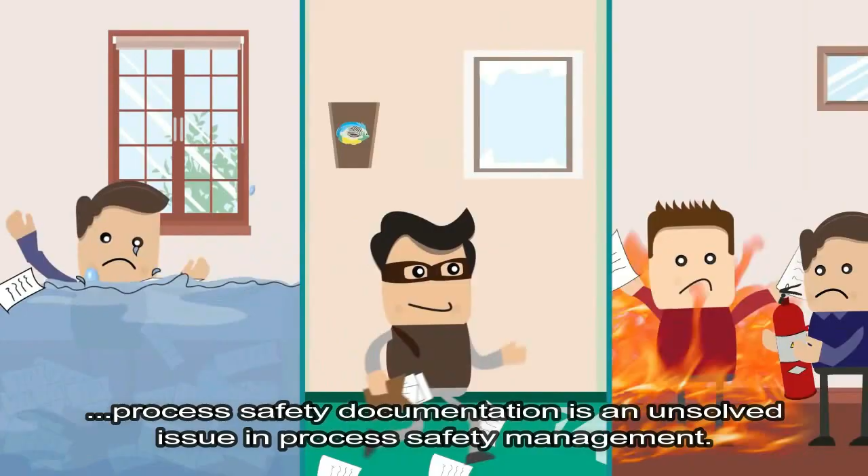Unavailability of an intelligence system to monitor plant performance, from informative process safety documentation, is an unsolved issue in process safety management. Unavailability of an intelligence system to transfer tacit knowledge to the next generation is also an unsolved issue in every plant.

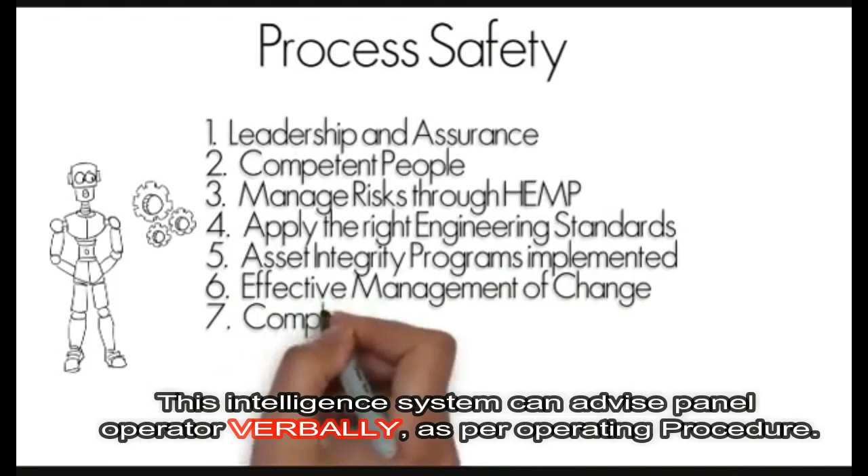Predictive intelligence system is the only solution to handle this unsolved issue in process safety management. This intelligence system is able to implement process lessons learned from previous incident investigations. It can advise the panel operator verbally, as per operating procedure, and it also contributes to layer of protection analysis to reduce alarm rate.

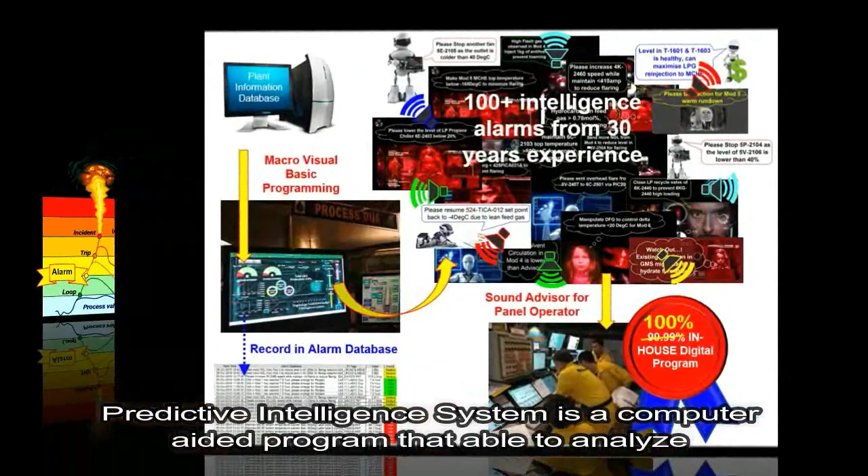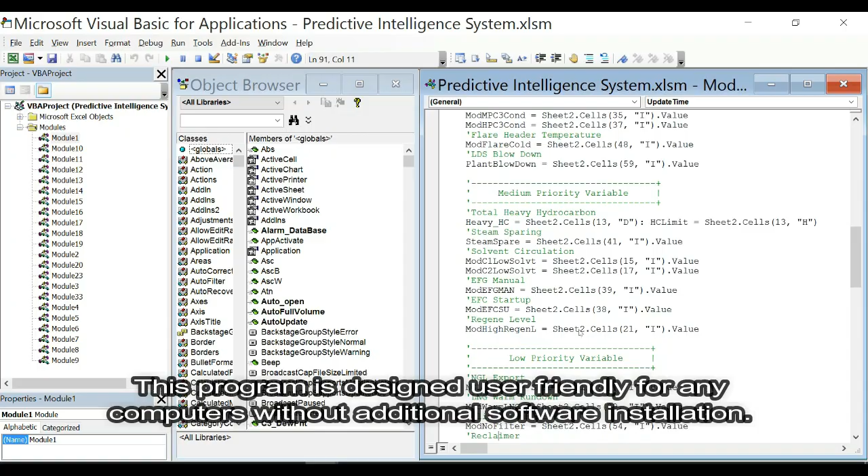Predictive intelligence system is a computer-aided program that can analyze complicated plant performance and provide descriptive advice with voice before plant upset. It is developed using Macro Visual Basic programming language with a Microsoft Excel interface, and is designed to be user-friendly on any computer without additional software installation.

It has the ability to extract live operating data from the plant information database, auto-updating every 30 seconds for complicated plant performance analysis. When a process deviation is predicted, the predictive intelligence system shows descriptive advice on the computer screen and advises the panel operator verbally.

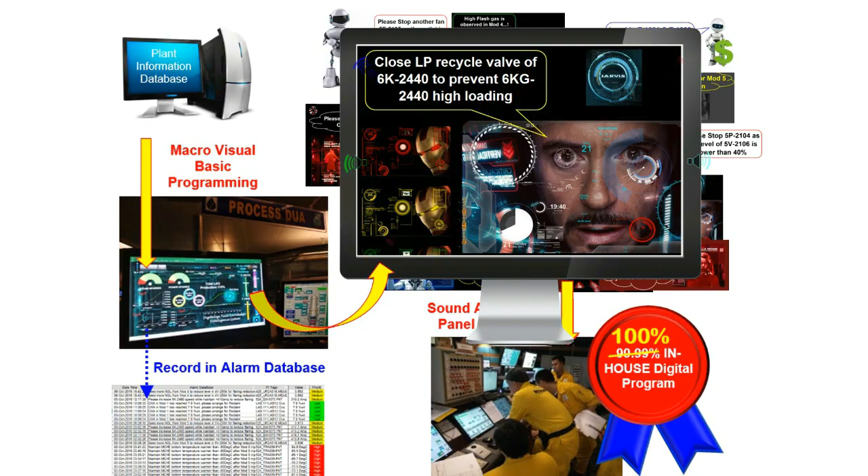The set point of PIC 31B must be 0.5 bar below PIC 31A, to prevent unnecessary flaring. Please close the LP recycle valve of the propane compressor in Module 6 to prevent gas turbine high loading. Please recover flaring from the overhead of the HPMR separator to the fractionation unit via PIC 200 controller in Module 6.

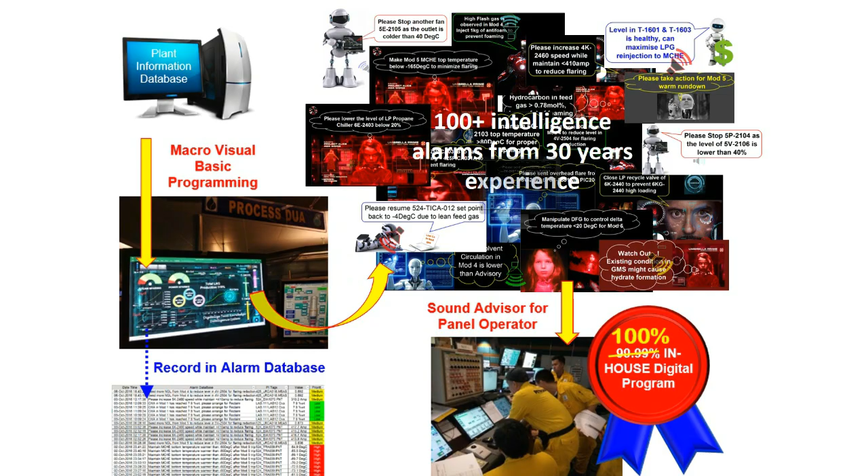High flash gas is observed in Module 4. Please inject 1 kilogram of anti-foam to prevent foaming proactively. Please resume the scrub column and set the temperature set point in Module 5 to -4 degrees Celsius, due to too lean feed gas composition.

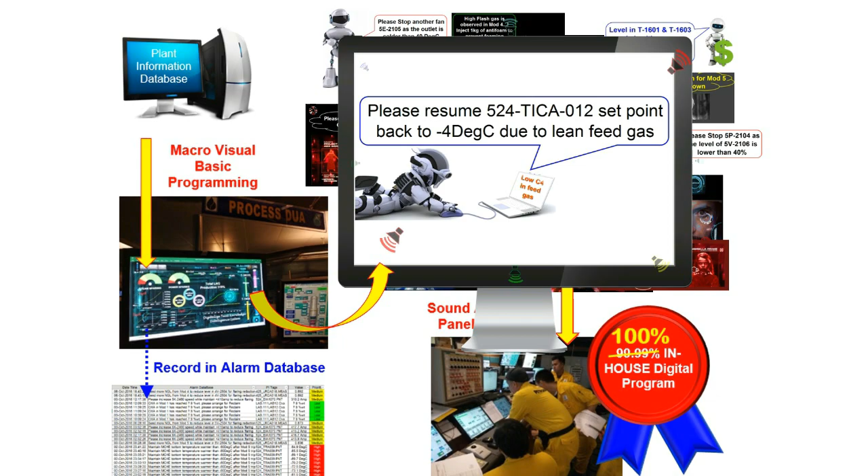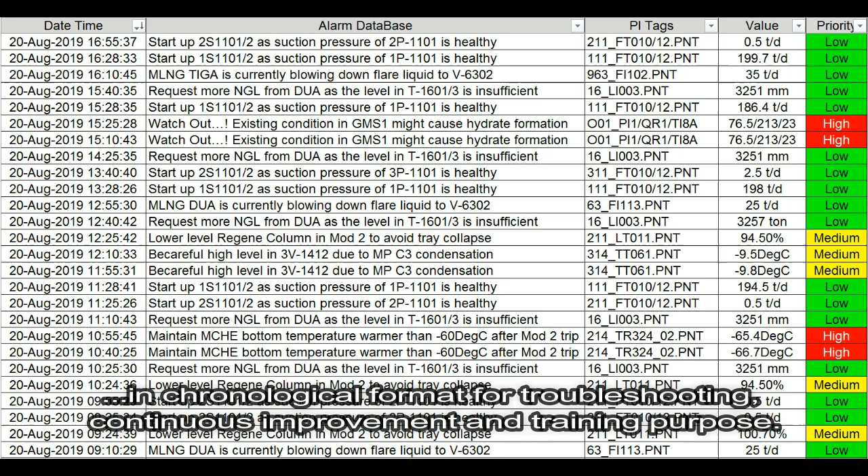All the advice is recorded automatically inside the alarm database in chronological format for troubleshooting, continuous improvement, and training purposes. It can even advise the panel operator during silent hours, to avoid process safety incidents, minimize production stoppage, and reduce flare wastage. Intelligence alarm is different from a common alarm.

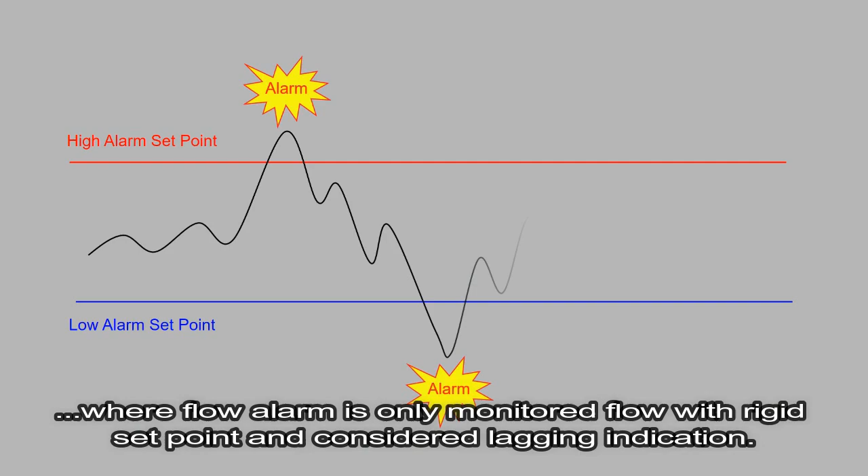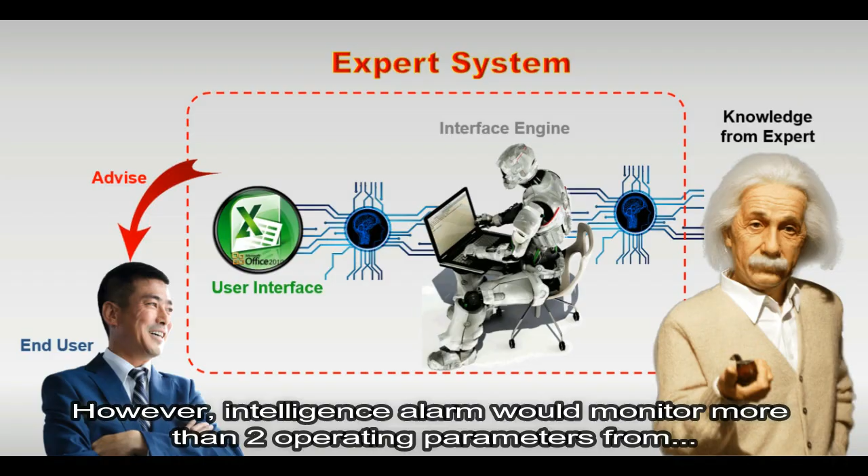The existing alarm system works mechanically, where a flow alarm only monitors flow with a rigid set point, considered a lagging indication. However, intelligence alarm monitors more than 2 operating parameters from a knowledge-based expert system, and considers leading indications prior to reaching alarm set points.

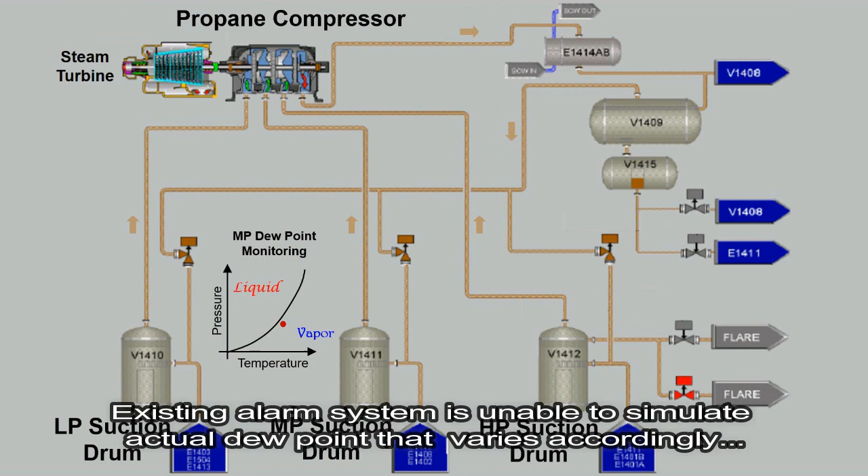An example of intelligence alarm is monitoring the dew point of propane vapor at the suction of the compressor. The existing alarm system is unable to simulate the actual dew point that varies according to pressure and temperature, but intelligence alarm can. Intelligence alarm is able to avoid condensation occurring inside the compressor to assure mechanical integrity.

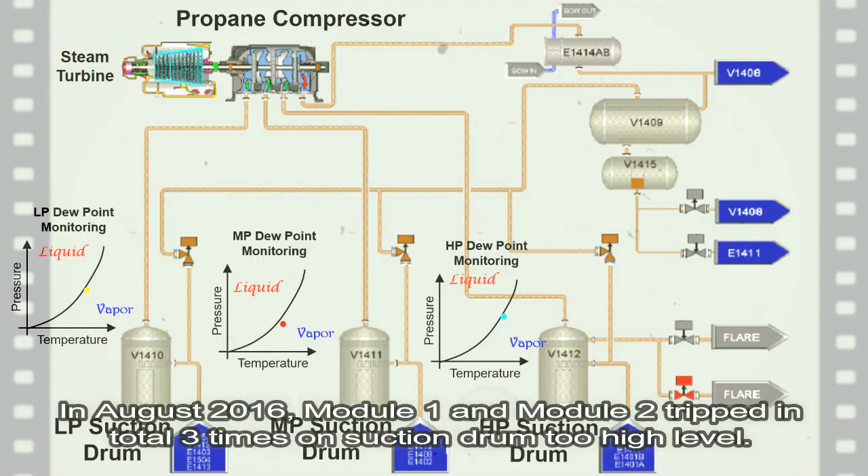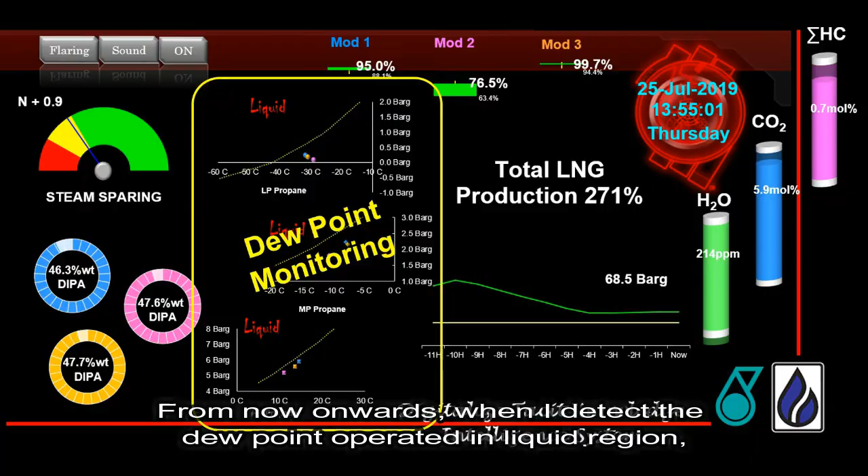In August 2016, Module 1 and Module 2 tripped a total of 3 times on suction drum high level. From process investigation, these issues happened because the dew point operated in the liquid region when reducing LNG production. From now onwards, when I detect the dew point operating in the liquid region, I will alert the panel operator to take necessary action.

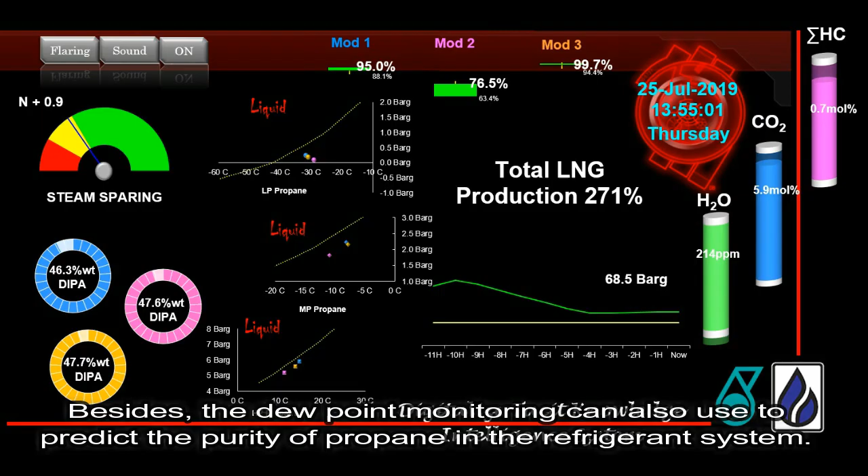The dew point of the propane HP suction drum in Module 2 is operating in the liquid region. Please adjust the propane compressor recycle valve or HP chiller load accordingly. Besides, dew point monitoring can also be used to predict the purity of propane in the refrigerant system.

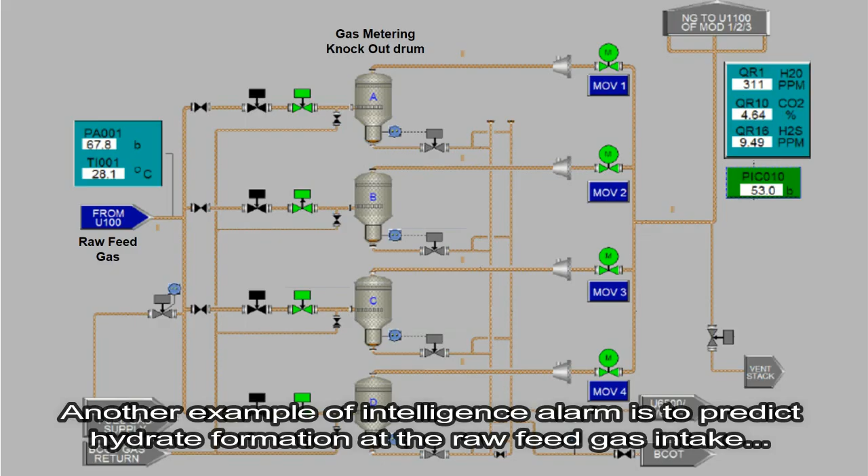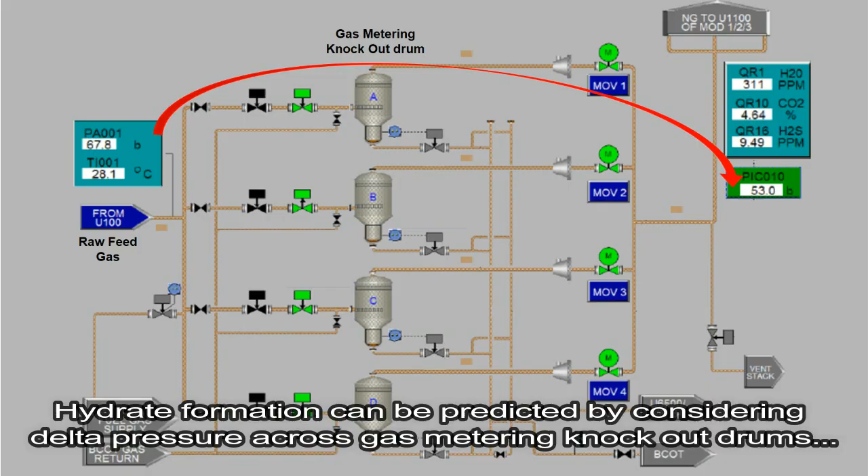Another example of intelligence alarm is predicting hydrate formation at the raw feed gas intake, as per recommendation in the process hazard analysis. Hydrate formation can be predicted by considering delta pressure across gas metering knockout drums, intake temperature, and moisture content in the feed gas.

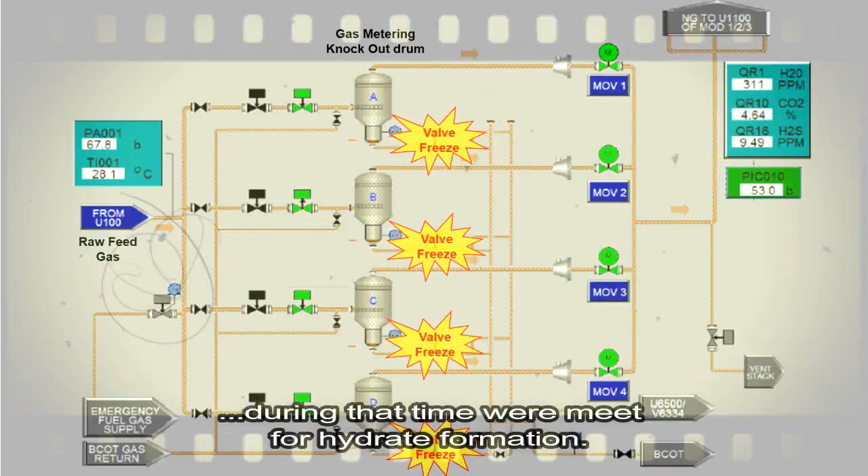In March 2015, all the level control valves of 4 gas metering knockout drums were unable to operate, resulting in too high a level. From the process investigation, all the operating conditions during that time were met for hydrate formation.

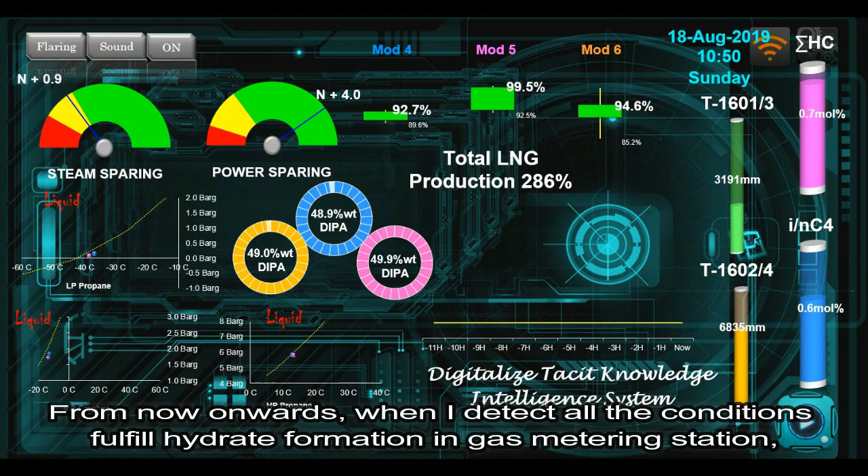From now onwards, when I detect all the conditions fulfilling hydrate formation in the gas metering station, I will advise: please increase the GMS DUA pressure controller set point, and further increase LNG production to mitigate hydrate formation in the gas metering station of MLNG DUA.

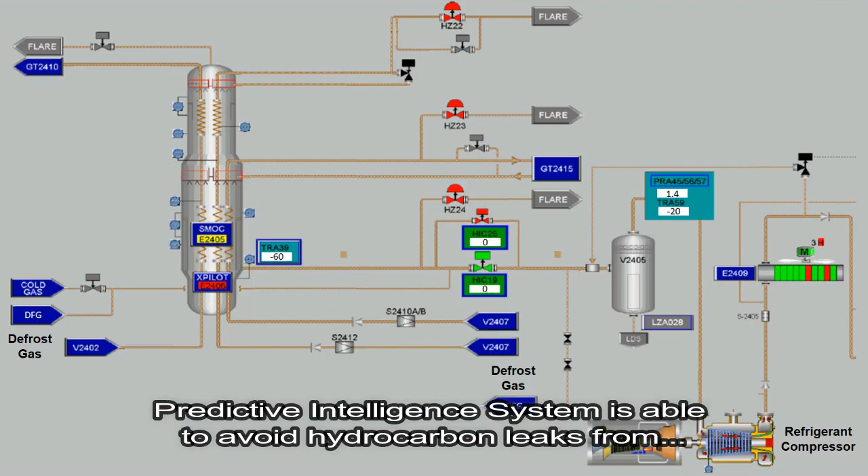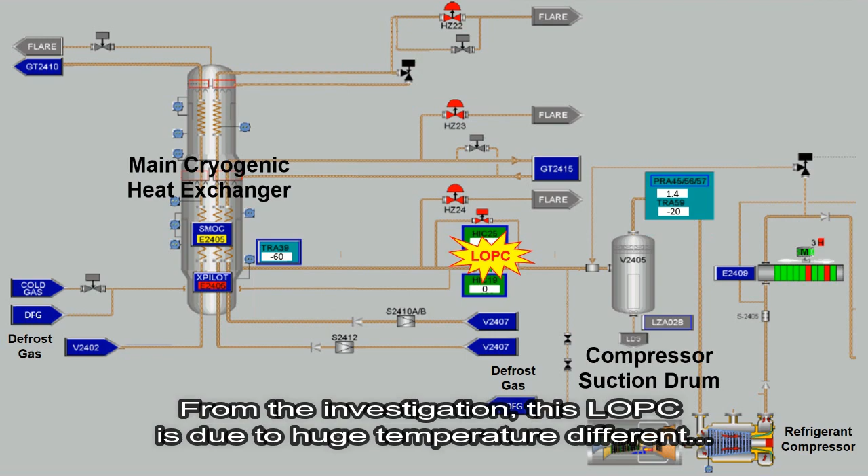Predictive intelligence system is able to avoid hydrocarbon leaks from the flange of a critical isolation valve after module shutdown. The valve isolates refrigerant flow from the main cryogenic heat exchanger shell side, and the suction drum to the refrigerant compressor. From the investigation, this loss of primary containment is due to a huge temperature difference between upstream and downstream of the isolation valve, after module shutdown.

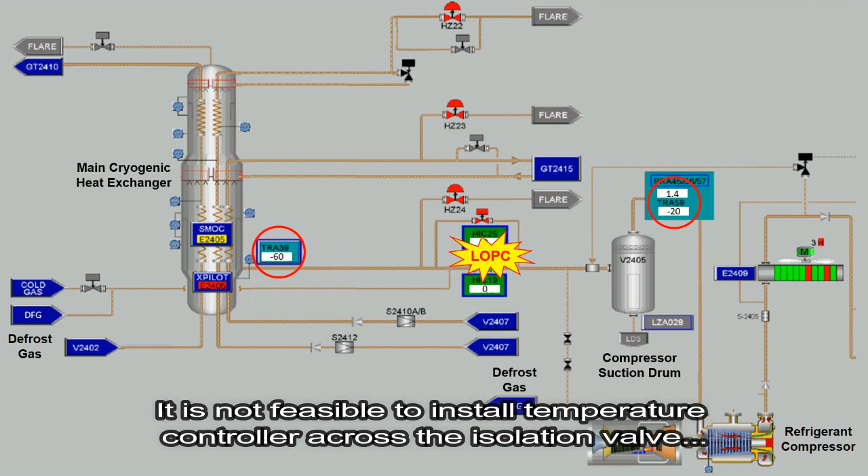When the predictive intelligence system detects the delta temperature above 20 degrees Celsius after module shutdown, it would alert the panel operator verbally: please defrost either side of HIC19 after Module 3 shutdown, as the delta temperature across the isolation valve has increased above 20 degrees Celsius. It is not feasible to install a temperature controller across the isolation valve, because both upstream and downstream defrost gas valves are operated manually on site.

Since the implementation of the predictive intelligence system in 2018, the leak has never happened again in subsequent shutdowns.

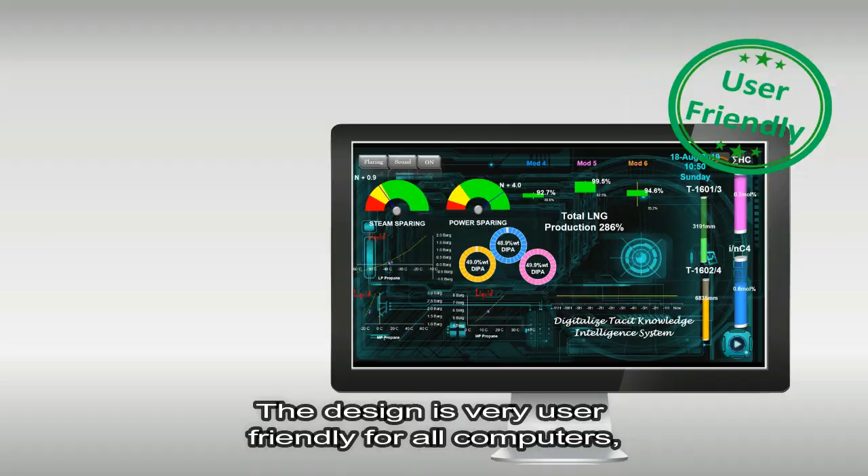As of this time, no such intelligence program is available in the market. The design is very user-friendly, for all computers, accessible via Microsoft Excel and the plant information database. Users are not required to install additional software, with very minimum investment cost.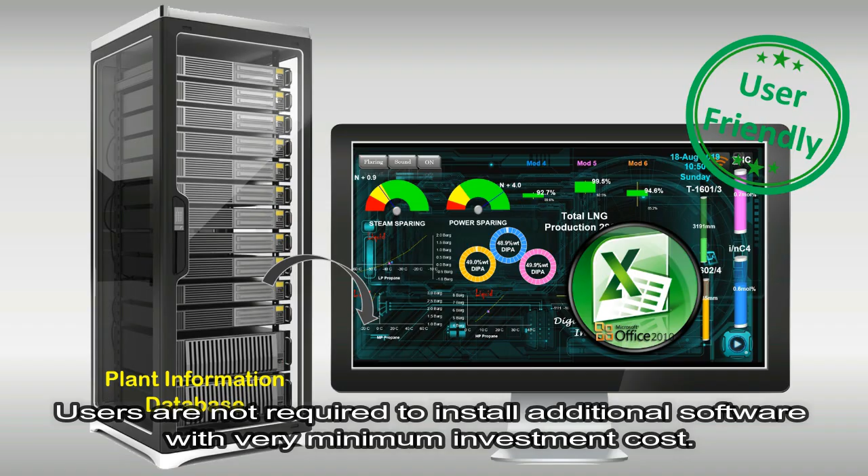It has no promotion plan and no retirement scheme. Once implemented in the panel room, it will keep on monitoring endlessly.

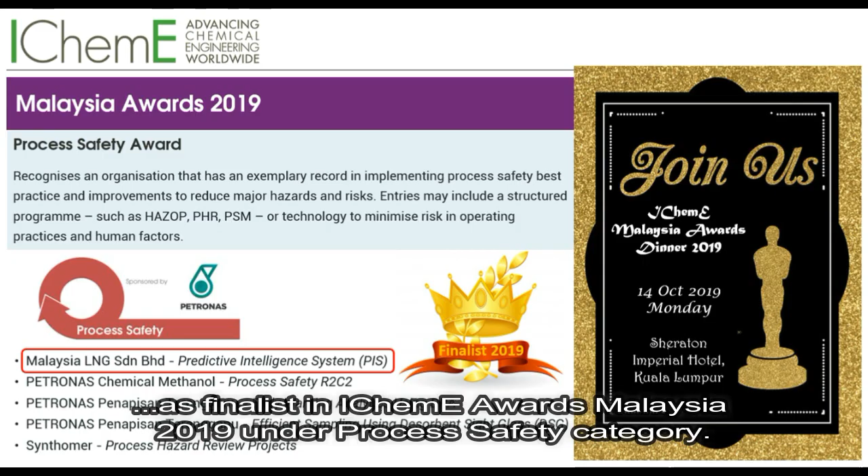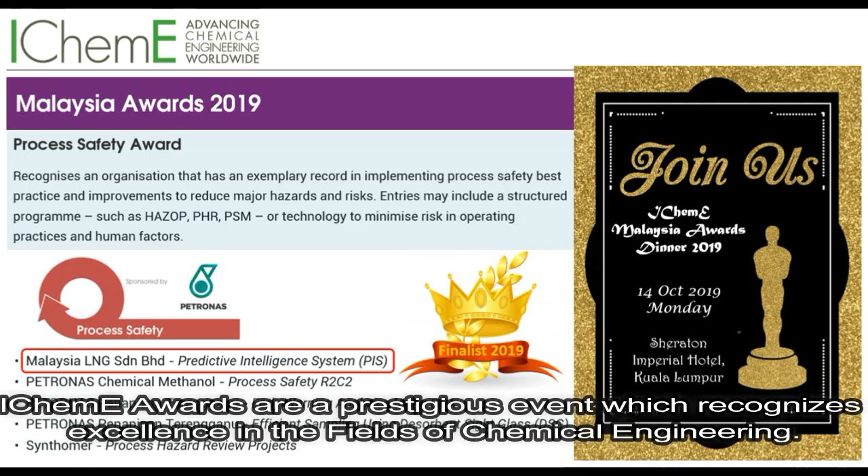We are proud to announce that Predictive Intelligence System has been chosen as a finalist in the IChemE Awards Malaysia 2019, under the Process Safety category. IChemE Awards are a prestigious event which recognizes excellence in the fields of chemical engineering. The winner will be announced on the 14th of October, at the Sheraton Imperial Hotel in Kuala Lumpur, during the IChemE Malaysia Awards dinner.